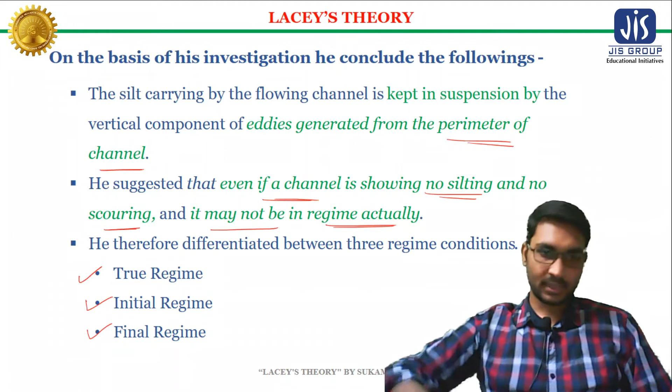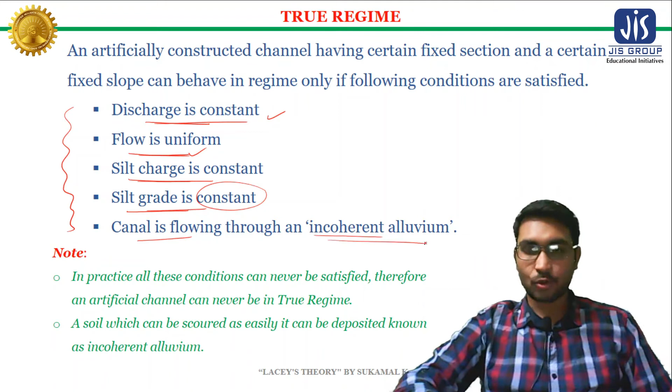And fifth, the canal is flowing through an incoherent alluvium. Now what is this incoherent alluvium? A soil which can be scoured as easily as it can be deposited is known as incoherent alluvium.

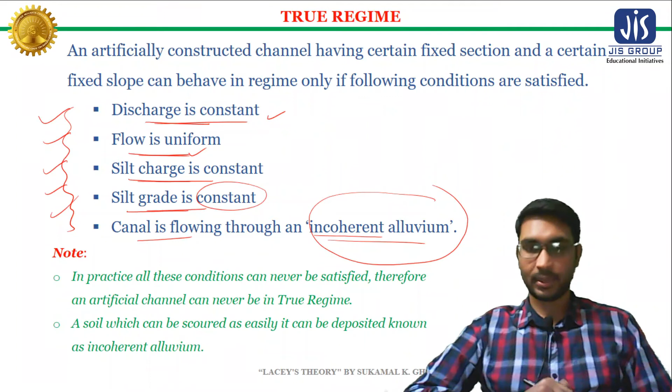Now, in practice, these five conditions cannot be satisfied. Therefore, an artificial channel can never be a true regime. It can be an initial regime or it can be a final regime.

Now what is the initial regime condition? The initial regime condition is the first stage of regime attained by a channel after it starts its service. In initial regime condition, the bed slope of the channel gets adjusted.

In our second last slide, we discussed that Lacey concluded a channel constructed in alluvium, to carry a certain discharge, will have its width, depth, and bed slope undergo modification due to silting and scouring till equilibrium is attained. Now, in initial regime condition, only the bed slope of the channel will undergo modification due to silting and scouring. You can see here the bed slope of the channel is increased, meaning the bed slope is adjusted by silting and scouring. Here is the important point: Lacey's theory is not applicable for initial regime.

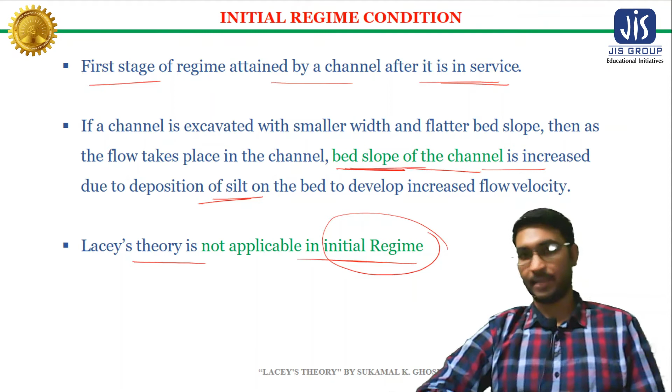Lacey's theory is only applicable to final regime. Okay, now let's discuss about final regime.

In final regime condition, a channel attains the ultimate state of regime. In this condition, the bed slope, the depth of flow and the width of channel are adjusted in order to obtain a stable channel section, unlike the initial regime condition. We have discussed that in the initial regime condition, only the bed slope of the channel gets adjusted. But in the final regime condition, the bed slope, the depth of flow and the width of channel, all these parameters are adjusted in order to obtain a stable channel section.

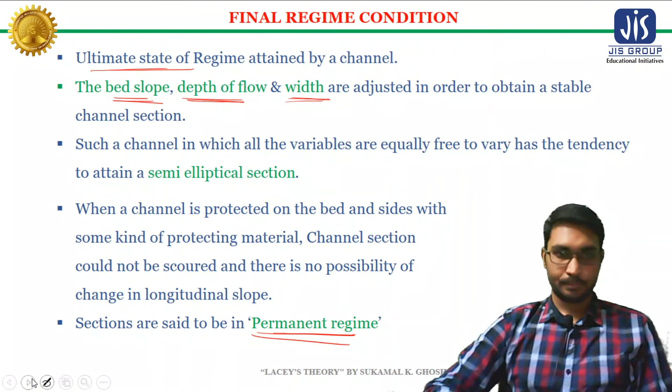As we discussed, Lacey indicated a regime channel has a tendency to attain a semi-elliptical section. So this is a cross section of a regime channel as per indication of Lacey - this is a semi-elliptical shape. For the finer silt, this is the cross section, and for the coarser silt, this is the cross section.

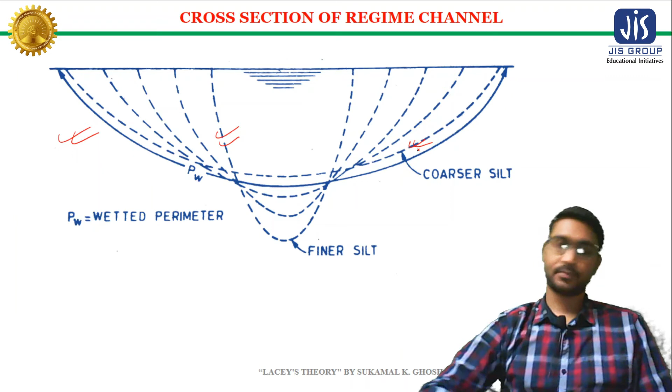As we discussed in our earlier slide, Lacey evolved a number of equations based on his own observation and previous investigations done by various researchers such as Kennedy. Out of these 14 equations, this equation, this one, and this equation have been developed by Lacey based on his own observation and the previous investigations.

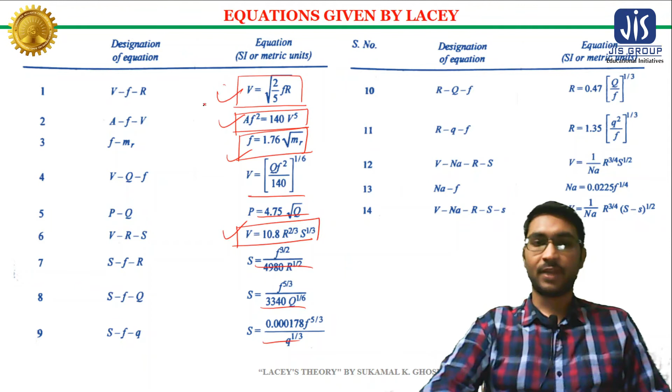So these 4 equations are the fundamental equations of Lacey. The rest of the equations are derived from these 4 fundamental equations.

We have also discussed that Lacey concluded the silt carried by the flowing water in a canal is kept in suspension by the vertical component of the eddies, which are generated throughout the perimeter of the channel. That is why Lacey has given a relation between the mean velocity and the hydraulic mean radius, and this hydraulic mean radius is the function of wetted perimeter P. We know that hydraulic mean depth, or hydraulic mean radius, is equal to the cross sectional area of the channel divided by the wetted perimeter of the channel.

That is why Lacey has given the relation between mean velocity and the wetted perimeter, because Lacey concluded the silt which is kept in suspension by the eddies, and the eddies are generated throughout the perimeter.

Apart from this relation, Lacey has also given a relation between the cross-sectional area, the mean velocity and the silt factor F. Now what is this silt factor? Lacey introduced silt factor F to make his equations applicable for channels flowing through different types of soil, and he has also given the values of silt factor for different types of soil.

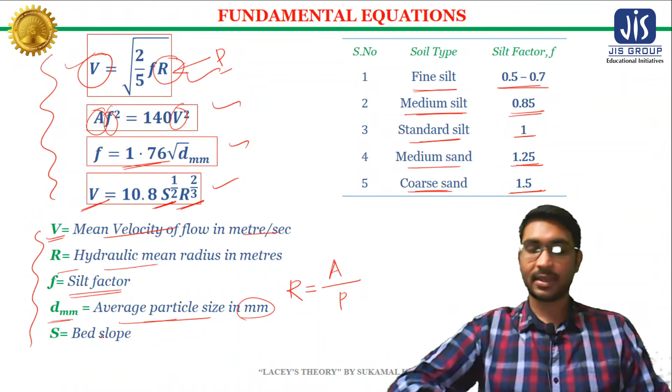Also, Lacey has given a relation between the mean velocity, the bed slope and the hydraulic mean depth or hydraulic mean radius. Now these are the nomenclatures: V is the mean velocity of flow in meter, R is the hydraulic mean radius in meter, F is the silt factor, D mm is the average particle size in millimeter, and S is the bed slope.

Now we are going to discuss about the various equations which are derived from those four fundamental equations. The first equation is the relation between the mean velocity, the discharge and the silt factor, given by V, mean velocity, equals Q into F square divided by 140, to the power 1 by 6. So how can we derive this equation from those four fundamental equations? Let's discuss.

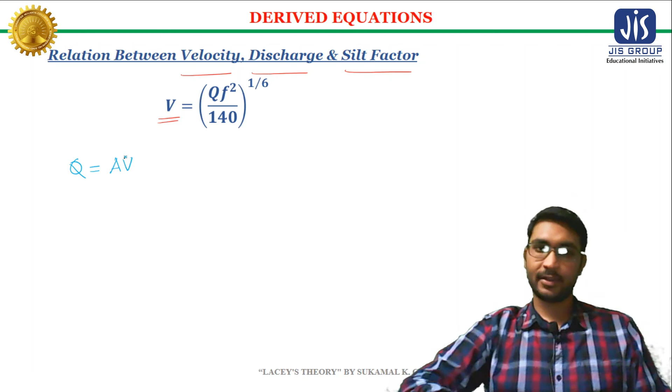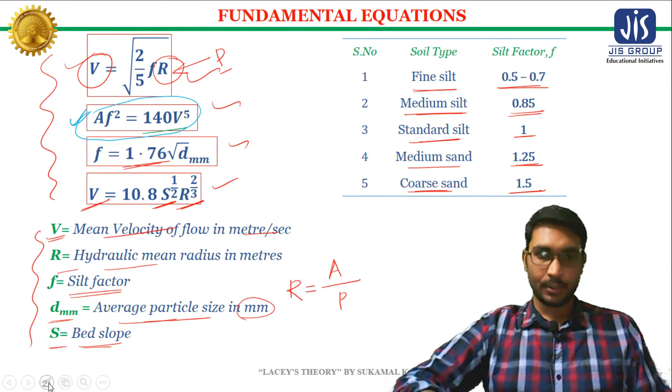We know that Q equals A times V. Now if you multiply F square on both sides, and recall from our last slide that AF square equals 140 V to the power 5, you can substitute: QF square equals AF square equals 140 V to the power 5 into V. Simplifying, QF square equals 140 V to the power 6. From here, V equals Q times F square divided by 140, whole to the power 1 by 6.

So in this way you can derive this particular equation with the help of one of those fundamental equations.

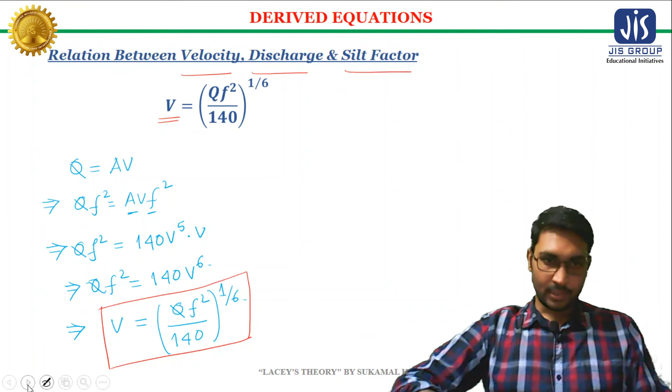This is another equation derived by Lacey from those fundamental equations, and this is a relation between the discharge and the wetted perimeter, given by P, that is wetted perimeter, equals 4.75 into square root of Q, that is discharge. So how can we derive this particular equation? Let's discuss.

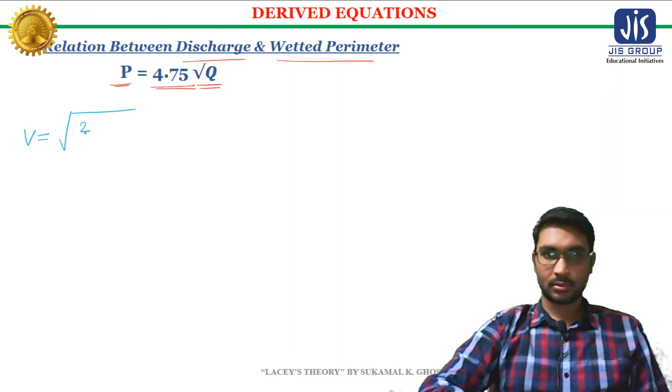From the fundamental equations we know that V equals root over 2 by 5 into F into R. Now squaring both sides, V square equals 2 by 5 into F into R. Squaring again, V to the power 4 equals 4 by 25 F square R square. Now we know that R equals A by P.

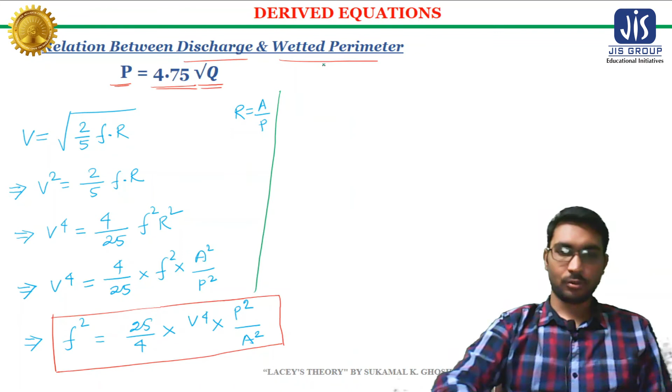If you put R equals A by P here, and calculate the value of F square, we also know that AF square equals 140 into V to the power 5, from the fundamental equations. Now if you put the value of F square, this expression, in place of F square, you will have 25 divided by 4 into V to the power 4 into P square divided by A square equals 140 V to the power 5.

Now this A will be cancelled with the A, and you will have only A. This V4 will be cancelled by this V5, and you will have only V. So from here, 25 divided by 4 into P square divided by A equals 140 into V. From here, P square equals 140 V into A into 4 divided by 25.

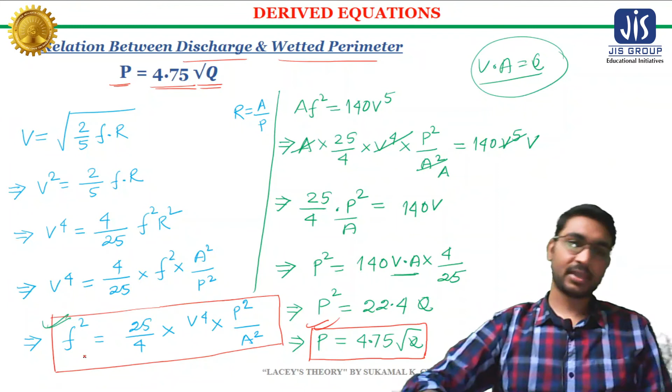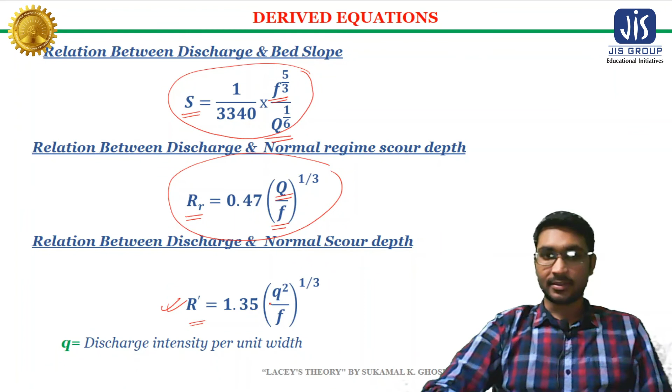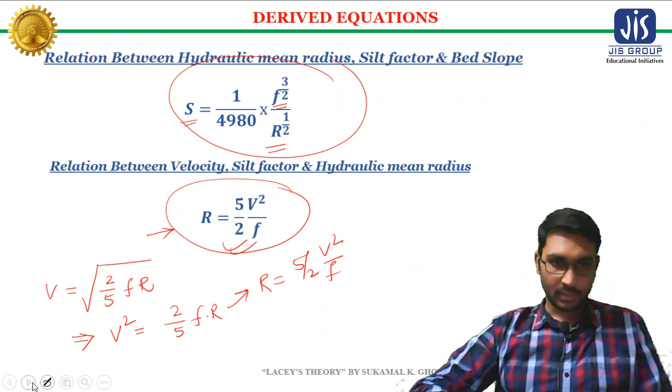Now we are going to discuss the steps involved to design an unlined alluvial canal using Lacey's regime theory. So if the value of discharge, that is Q, is given and the value of mean particle size, that is dmm, is given, then the following steps we need to perform to design an unlined alluvial canal based on Lacey's regime theory.

Our first step is we need to calculate the silt factor using this particular equation: silt factor F is equals to 1.76 into square root of dmm.

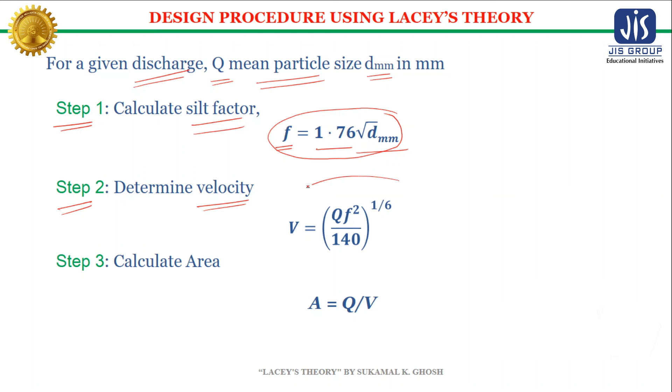Now in our second step we need to calculate the velocity, means the mean velocity, using this particular equation, that is V is equals to Q into F square divided by 140, whole to the power 1 by 6. We have derived this particular equation in our earlier slides.

Now in step 3 we need to calculate the cross sectional area of the channel which we need to design, using this particular formula, that is A is equals to Q by V. We know that Q is equals to AV, so from here we can write that A is equals to Q divided by V. So this is nothing but this particular formula.

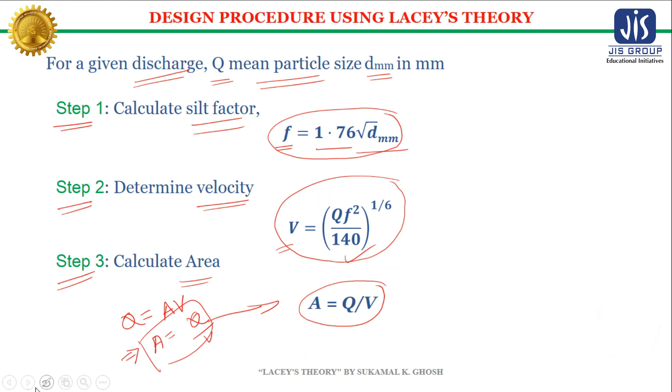Now in step 5 we need to select a cross section for the channel which we need to design. As we discussed for Kennedy's theory also, we generally consider a trapezoidal section with a side slope of 1 by 2 horizontal to 1 vertical.

In step 7 we need to derive an expression of wetted perimeter for the selected cross section. If you select the trapezoidal cross section with a side slope of 1 by 2 horizontal to 1 vertical, then you will have this particular expression for the wetted perimeter.

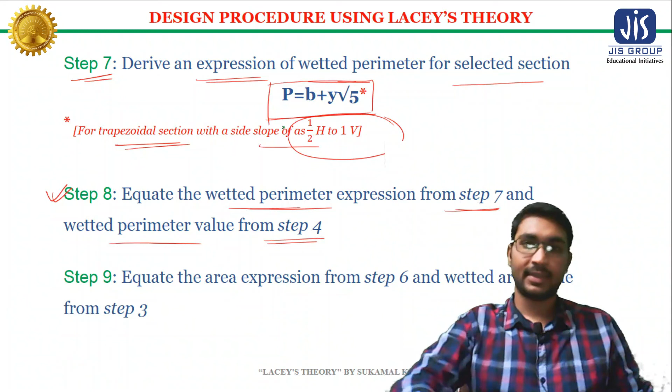Now in step 8 we need to equate the wetted perimeter expression that we have got from step 7 and the wetted perimeter value from step 4. It means we need to equate this particular expression to the value we have got from that formula.

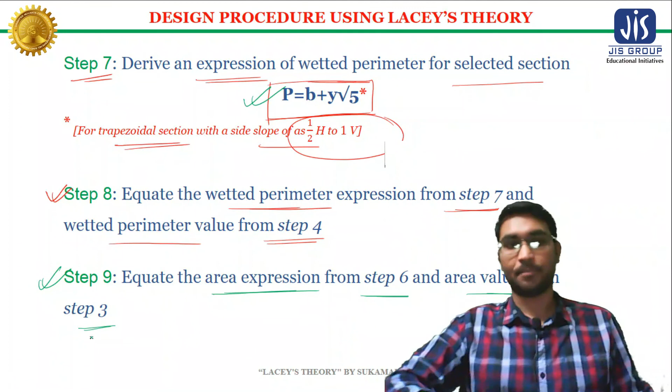In step 9 we need to equate the area expression that we have got from step 6 and the area value that we have got from step 3. It means we need to equate this particular expression to the value we have got using that particular formula.

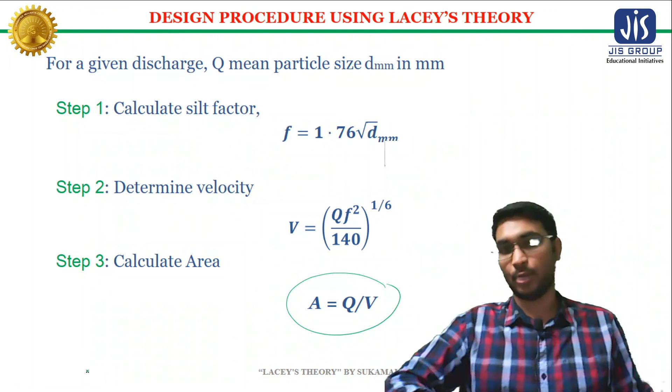Now in step 10 we need to calculate the hydraulic mean depth or the hydraulic mean radius using these two expressions. It means we need to use both of these expressions to calculate the hydraulic mean depth or hydraulic mean radius, and the values that we will get from these two expressions should be equal. Then only we can consider that whatever steps we have performed from step 1 to step 9 are correct.

And in step 11 we need to calculate the bed slope using this particular formula.

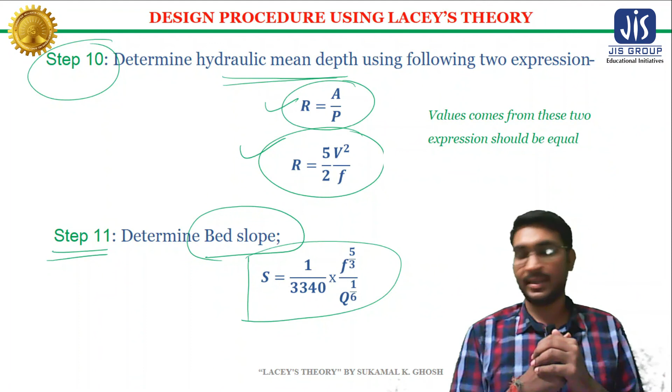So this is all about Lacey's regime theory. Next lecture we will discuss a design problem based on this Lacey's regime theory, and we will also compare Lacey's theory and Kennedy's theory, and we will discuss the limitations or drawbacks of Lacey's theory.